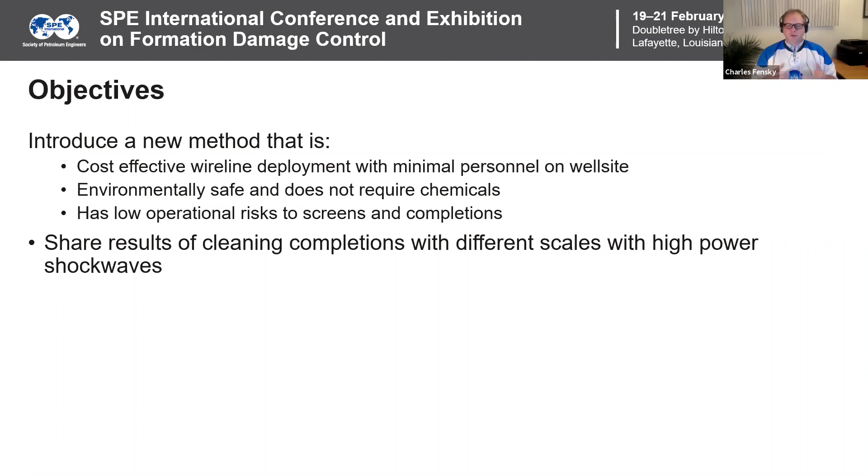This is a method also that has low operational risks to the sand screens and completions. What I'm going to share with you today is the results of cleaning some of those completions with different scales and high pulse power. So let's start off with a problem statement. In a well where you actually have formation fluids coming up, some of them may be water, some of those waters may actually have natural ions occurring.

As those ions transition up the well, they go through different pressure and temperature changes, and there are typically cases where they actually lose their solubility and start accumulating. So we can see them accumulating at the entrance portion in the well over the perforations. We can see them accumulating over the tubular as it comes up, as the pressure and temperature conditions change. And in extreme cases, they may actually block off or prevent the access to the wellbore itself.

This phenomena occurs in the tubing and casing. It also occurs actually in the sand control devices themselves. This device that was intended to actually filter out those fines and debris can also become blocked up with scale and debris as well. This scale can actually start plugging up this flow path or actually binding up the device itself.

So I'm going to go ahead and launch our next poll. So this one's just a yes or no question. Do you have scale issues in your well? Give a moment for some answers. All right, so let's go ahead and end the polling. I'm going to share the results.

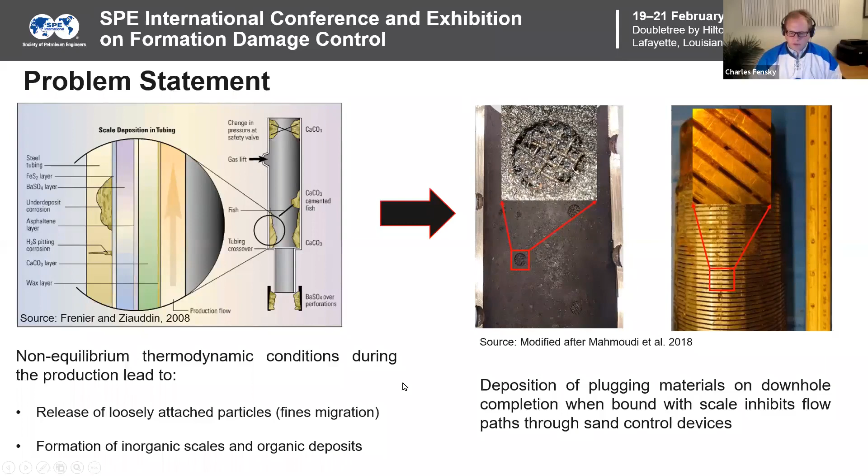So what we talked about a little bit earlier was what the Blue Spark tool does: it transforms a small amount of energy and converts that energy into high power shock waves. Why a small amount of energy is reasonable is we still have a finite wireline cable to deliver that energy into the well. So what we have here is an example of a sample that was provided by a customer. And in this sample, the flow paths are blocked up with scale and debris.

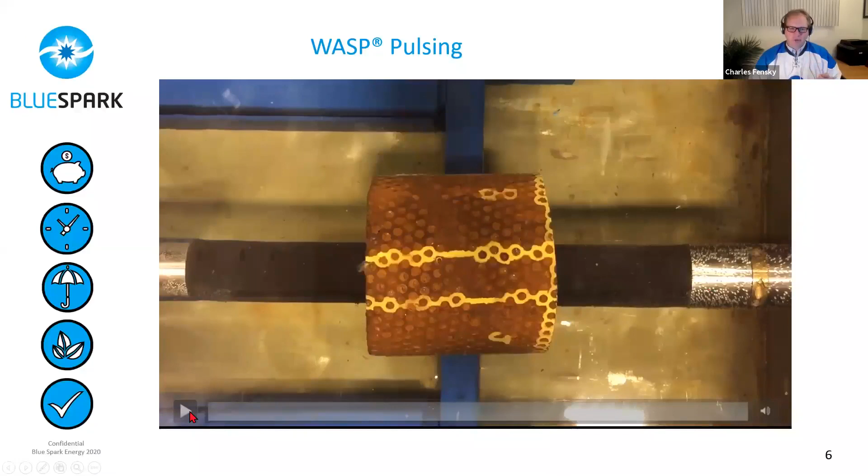So I'm going to start a video now, which is going to give you a visual representation of that transformation of electricity into mechanical shock wave, and let's see what happens. So the tool does a series of pulses where it actually converts that energy and releases it. And you can see those pulses actually transforming and breaking up that scale and debris.

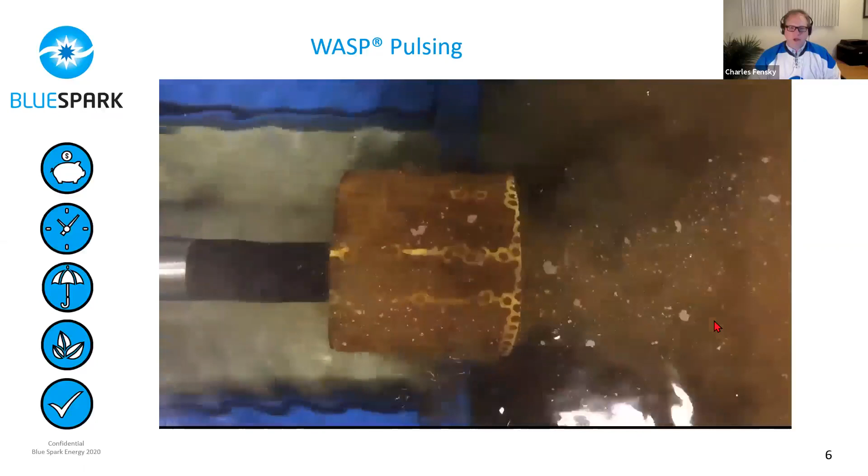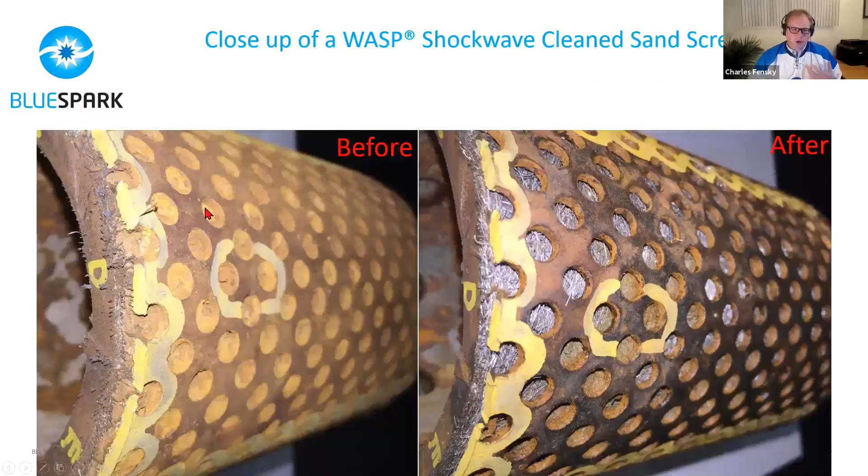So let's have a closer look. So on my left was the original sample. We can see the flow paths now have a blocking mechanism, which is a combination of sand grains, calcium carbonate in this case, and some iron carbonate or a corrosive type scale. Now with these blockages, it's very difficult for the fluid to come through. When we use the application of high power shock waves, what we observe is those blocked areas have now been cleaned up. So now the fluid can actually flow in and out as desired.

But what's more important is that at this energy level, we're not actually harming the ductile materials, which are the metal. Any of the brittle materials, which are the scales, those are broken up and fractured, but the ductile materials of the sand screen are unharmed. And we observe the same thing in wire wrap screens and also casing and tubing as well.

In this paper, we talked about an experimental process of actually cleaning up these devices with shock waves. We used 4 samples that were retrieved from a well with different types of scale that were causing blockages. We used the actual downhole tool like you would use in a real well. And then we pulsed it just like you saw in the video, giving it those shock waves to break up that brittle material. And then we observed the cleaning effect: as we applied more of those shock waves, how much of those slotted liners are actually cleaned and opened.

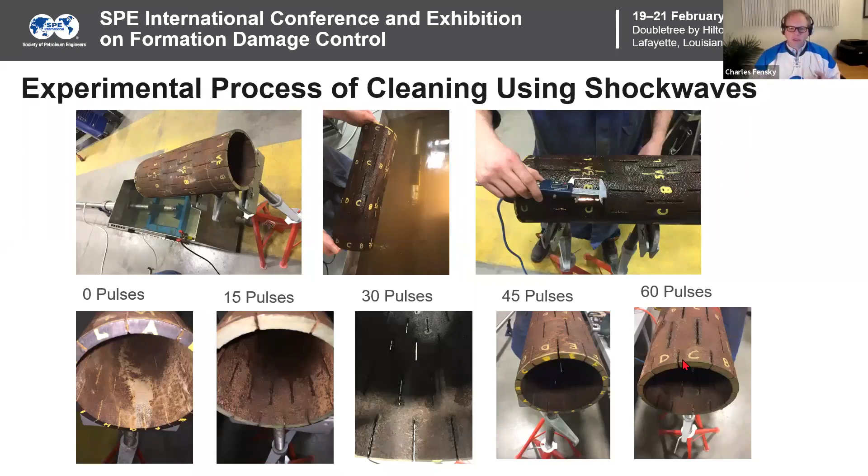We then continued it to 45 pulses and 60 pulses. What was key at the 60 pulse range, we were observing the corrosive or iron oxide based scales getting cleaned up. And we looked at that for the different types of samples that we were going through.

In addition to looking at the actual cleaning, we also looked at the scale themselves. As you'd expect in a sand control device, we would have the silicon dioxide and fine materials accumulating in, that's their job. But we also saw this glue or bridging agent present, related to the different scale elements as well. So this is the item that was binding up and locking those in place. In the samples, we had different contributions of calcium carbonate, the iron oxide, and of the actual solids materials in addition.

So I'm going to go ahead and launch another poll now.

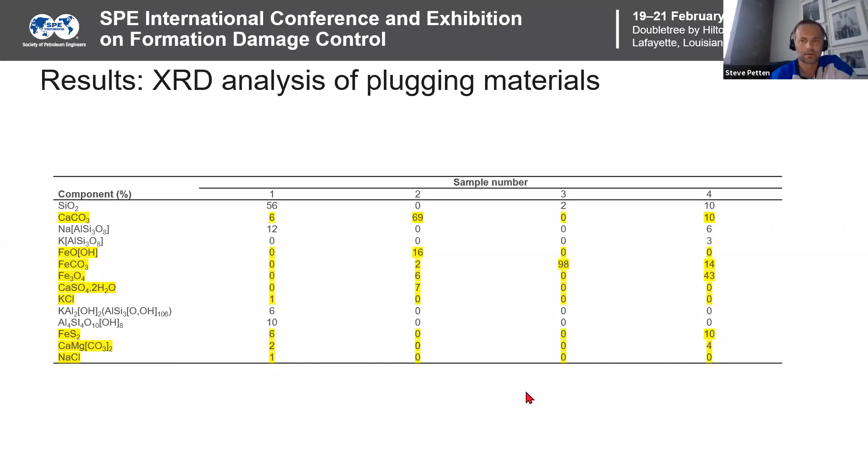So in this study, we talked about actually taking samples of that scale. What we did in addition to that is, of the pieces that were broken away compared to the ones that were not broken away, we observed that when we magnify them with a scanning electron microscope and some higher resolution, we can observe in those brittle materials, those shockwaves are actually making micro cracks and fractures. So whether that be in the calcite or calcium carbonate or in the Fe based, that's the key element of this methodology, the fact that with those brittle materials, when they're applied by shockwaves, they fracture and break up. That's what breaks up the glue, which is actually what releases the rest of the structure as well.

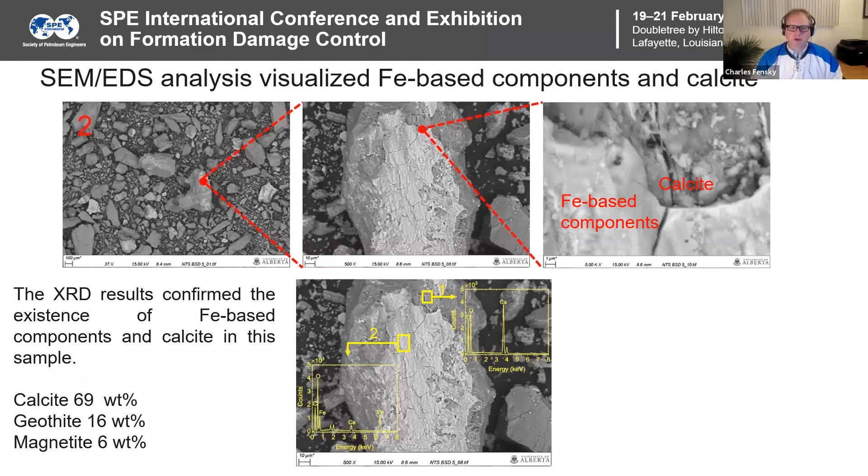We also observed that where you have combinations of items, where you actually have calcium carbonate and silicon dioxide or a ceramic type material, those brittle items related to the calcium carbonate are where we're starting to see the fractures occurring. The actual formation materials that relate to that are much tougher, and at our energy level, we're not seeing any damage to the sand grains themselves.

So there was a question that came up related to, can we look at working in ceramic sand screens? To date, we haven't, but that being said, when you look at this methodology, it would make sense that at our energy level, we're not going to be harming some of those ceramic coatings because they're much tougher than the calcium carbonate or the barium sulfate that we can do at our energy level. So this methodology is quite unique, and it is breaking up that weakest link of the calcium carbonate or brittle scale, which is causing the flow mechanism to open up from there.

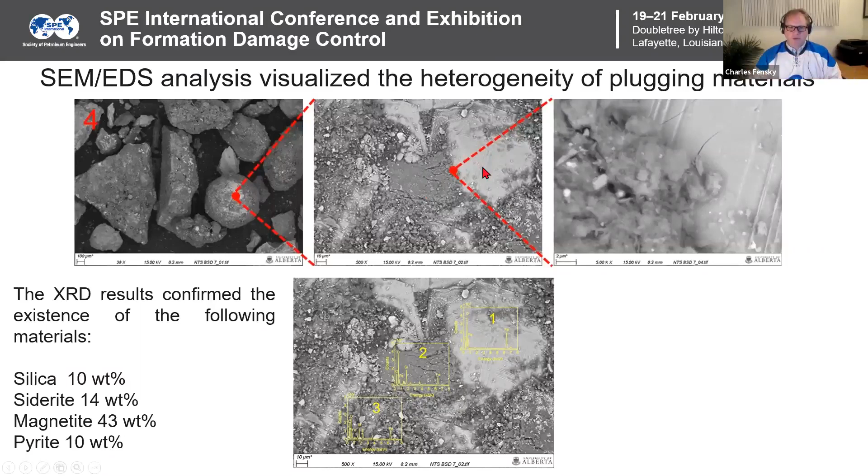What is also in the paper, we went through several different case studies from around the world. I'm only going to hit on a few of them in the time window that we have allowed for us today. So the first one I want to hit is where we used the BlueSpark tool to do two different tasks in the same well. Task A related to an accessibility issue in a well where there was scale accumulating on the ID of the wellbore. So we can see in the caliper log how some of that wellbore has now been shrunk as that scale has accumulated around it.

As we applied those high power shock waves, we observed that scale being broken up, and where the shock waves were applied, the scale was broken off the wall and into smaller pieces, returning it back to its original ID. What's also key about this application is we did two jobs in the same well. So although we cleaned up the area in the tubing and casing, we went deeper into the well and pulsed over the perforated interval as well. This also had an issue or a challenge where the scale had accumulated in the perforation throats, restricting flow. So by breaking up that scale, opening up that flow path or opening up that door, we're able to get flow to start coming back through the well again.

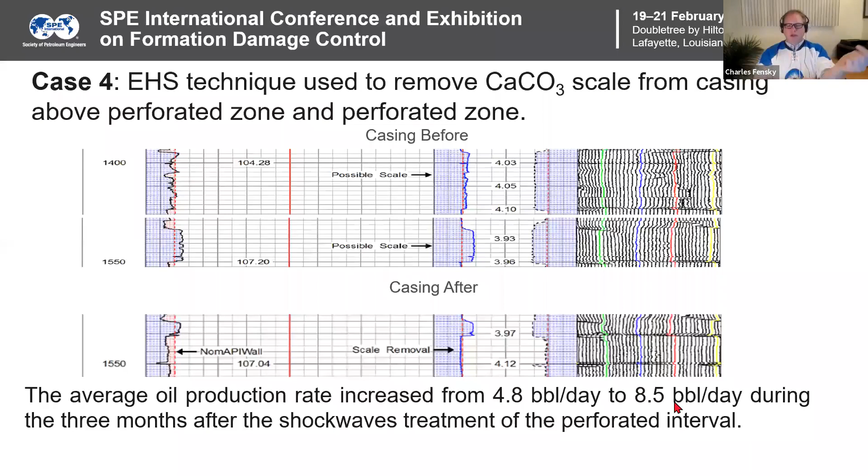The second case study I'll hit on was actually a 9-well aggregate of wells that were done in Texas. But what was specific about this one is the challenge was to remove barium sulfate scale. This is a scale that has a lot of operational challenges to remove traditionally. Over these 9 wells, we actually observed an aggregate 45% increase in oil production and a 72% increase in gas production. These were the desired effects of what they were looking for. What was also observed was actually a 0.5% decrease in water production.

How does this happen? The application of shock waves is actually very specific to wherever the wireline tool is located. What that allows you to do is selectively treat where you want the fluid to flow, but not actually treat areas where you don't want the fluid to flow. So you can stay away from water producing areas and just target where the primary oil production is coming from, for example.

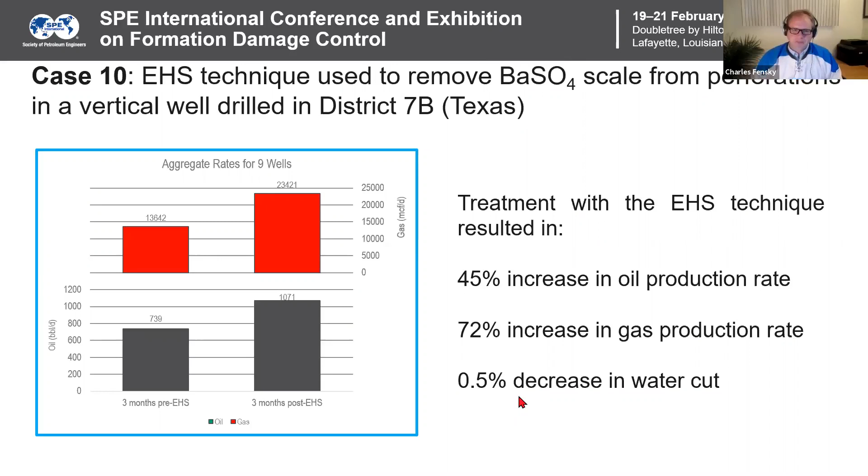So as a summary of the case studies that were presented in this paper, where our primary challenge was calcium carbonate or barium sulfate or any other of these types of scales, we actually observed positive results, whether that be increased oil production, opening up those doors, getting that fluid to flow through, or if the desired result was to remove scale and debris from different downhole items, whether that be a plugged gas lift valve or a subsurface safety valve that wasn't sealing or had been stuck shut. Applications of those high power shock waves to break up that scale have been effective.

This has been done in vertical wells, deviated wells, and horizontal wells. This has also been done in different places around the world and at different pressures and temperatures. One of the items which has been quite popular has been work on light well intervention vessels. This is a particular environment where POB, or number of people on site, is quite limited or critical, where you really need a small footprint, and where you can have one tool that can do multiple different jobs. So being able to remove scale from the ID, repair a downhole device, and even open up some flow became very beneficial from a single device.

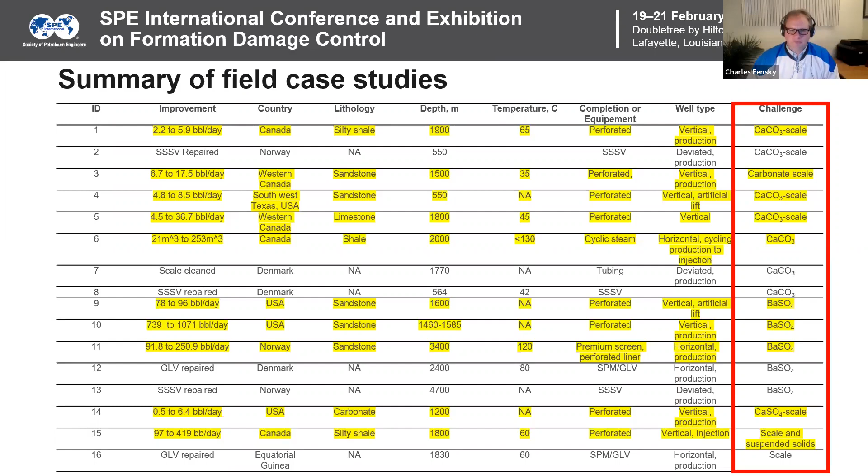So, sand screens win. I guess that makes sense from the topic of your presentation, Chuck. That's great. We also got subsurface safety valves coming in a close second, which we've had a lot of experience with over the last couple of years in Denmark and Norway, helping some customers there with some challenging SSV issues that they have with scale.

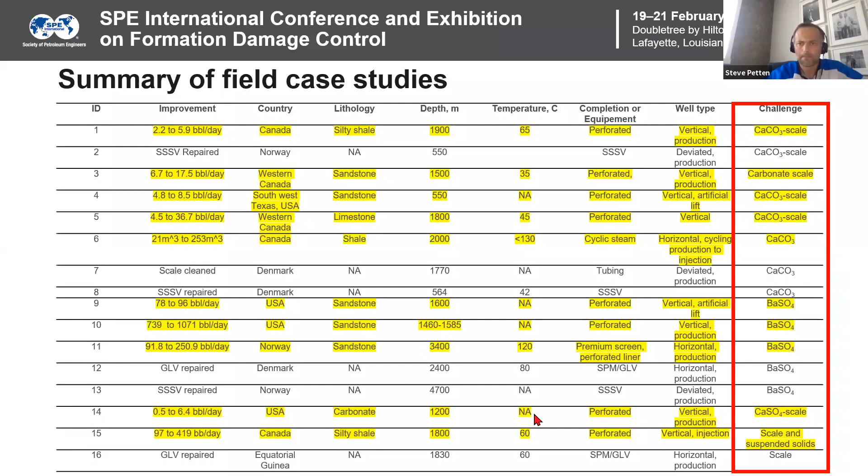All right, so I'm just going to conclude our presentation here. The application of high power shock waves has the ability to break up brittle scales. We see it causing those microfractures, which break up that structure. The shockwave cleaning does not harm the completion equipment itself. This relates to the ductile material, the metals, being able to absorb that energy, but the brittle material of the scales not. This has been a very effective method for cleaning up scale problems at many different places in a well, whether that be at the sand face or as they work their way through. And it really is a solution where the challenge is brittle scales.